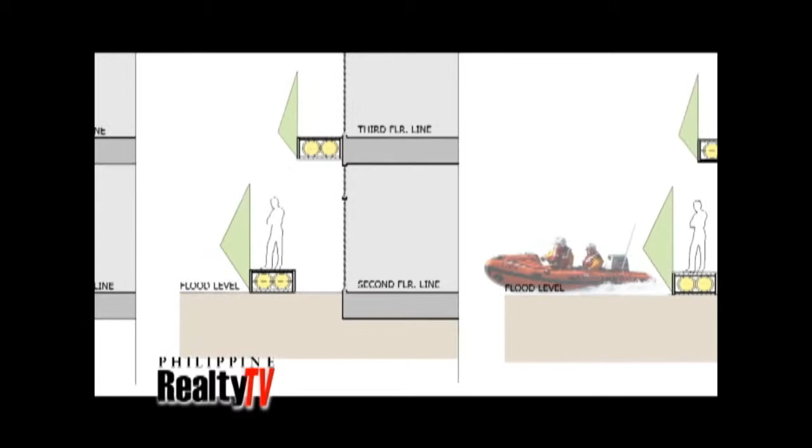And I think the most important is access, because they couldn't be saved because there was no access to simply where they were. So we have to provide some sort of escape. Whether it's just to get from room to room or to get out of the place where you're stuck in. Okay. Can't wait. Thank you. Thanks, Jason.

With a project defined and the objective set, it was up to Buensalido Architects to continue and bring the vision to life. We really drew inspiration from the people who were affected during all of these storms. We wanted to come up with an authentic solution that works without them having to migrate. Because for a lot of people, they don't have a choice. It's our job as architects to come up with a smartly designed house, with a house that responds to the climate, that moves with it, that adapts, to come up with a better kind of life for all of these affected people. So that was really where we drew our inspiration from.

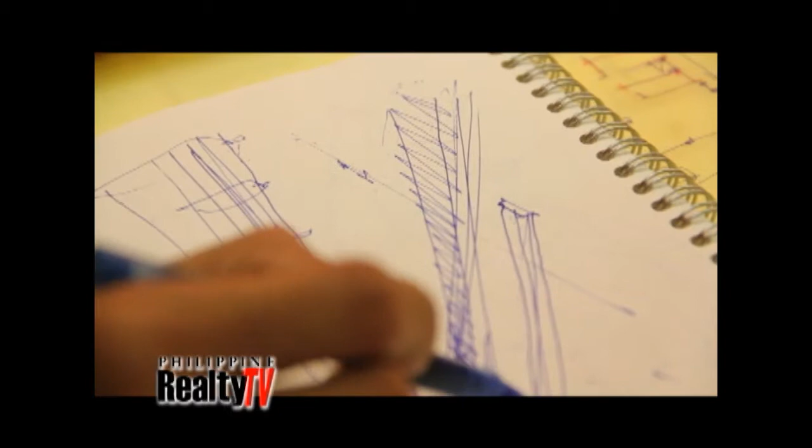After several weeks of designing, drafts changed and new design solutions attempted. John returned to the office of Buensalido Architects for the presentation of the final design of Project Smart Home Marikina. We basically wanted us to come up with a 5-door, 2 or 3-story apartments, a 3-bedroom townhouse with 1-car garage, possibly 2 if the space allows.

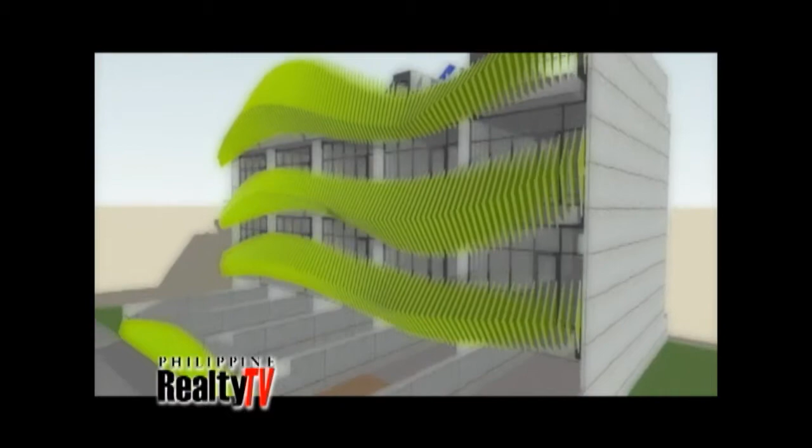Our concept is amphibious living. We're trying to mirror the characteristics of the subject, in this case, the floods, to attain a kind of seamless functional transition. So instead of fighting against the flood, you're actually getting its characteristics and trying to design your house to adapt to it by mirroring it or copying the way it moves, the way it behaves. The first thing is we plotted the flood level in the area, which is about 8 feet. The flood level basically eats up the entire first floor. And so the first thing that we did is we raised the entire house to be on stilts, just like the Bahay Kubo.

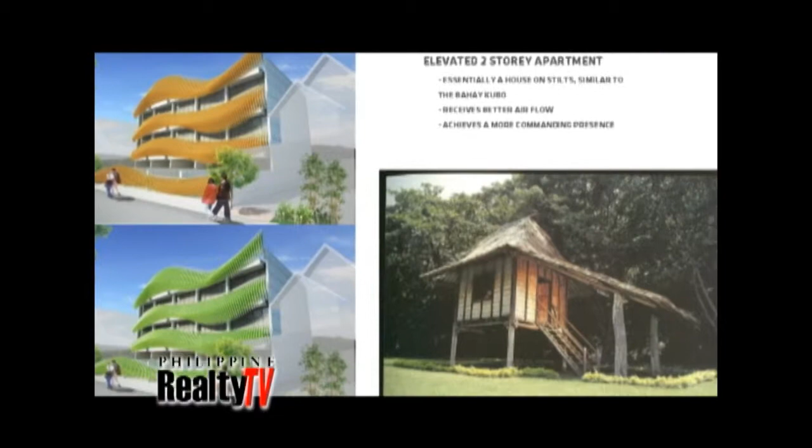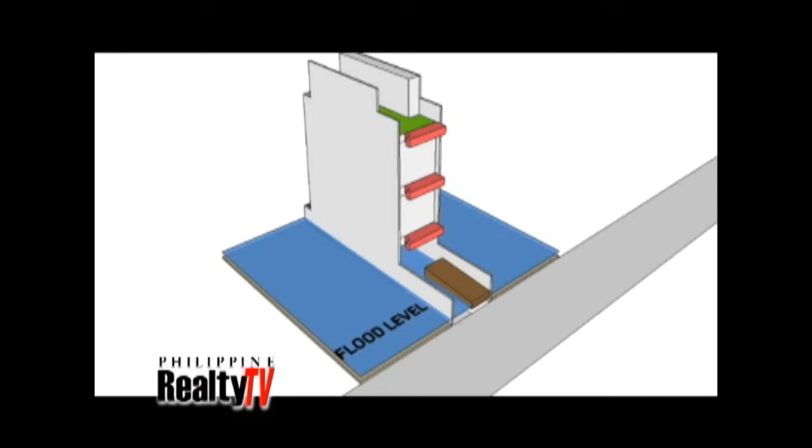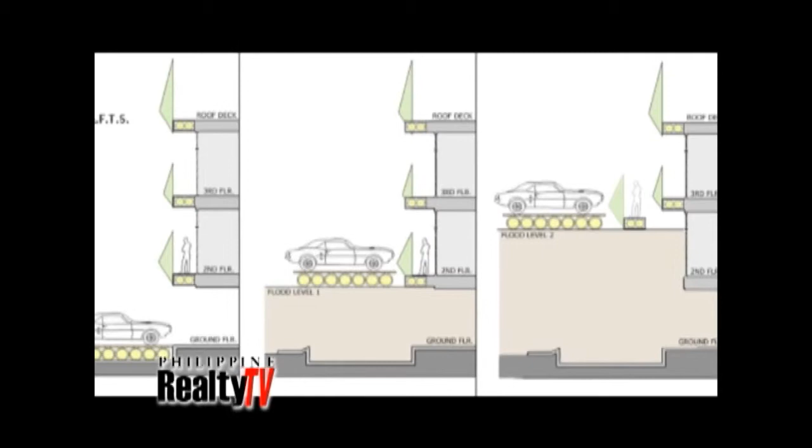I think the most unique idea that we came up with are what we chose to call RAFTs, or regenerative, amphibious, floating terraces. And they're essentially floating rafts. So it's essentially balconies that can float and can be detached. So you're never caught at a moment where you're stuck in your own house. Even one of the carports can actually be converted into a sort of raft, which can also float during flood. Wow, you've got to be kidding me. No. It's gonna float. The car will float. Yeah, that's the intent. And we have calculations to support that.

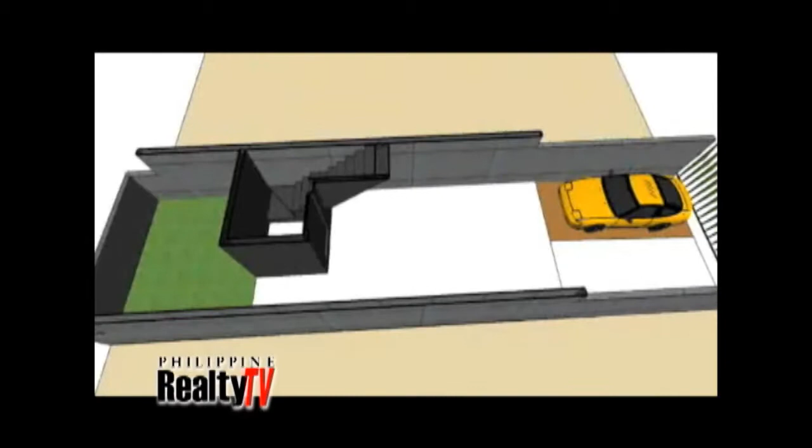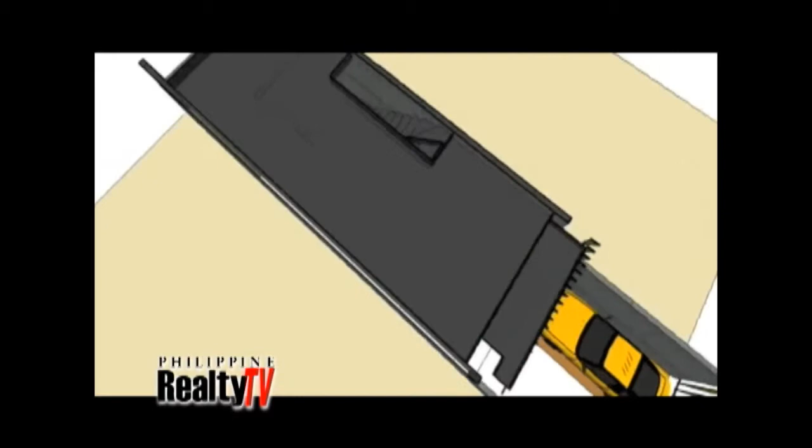Okay. This is an aerial view of the ground floor. This is essentially your open space or silong, so you can have parties there. And then you just have a basic access, so you have your front foyer, which leads to the staircase going up. Which leads us now to the second floor of the space. We switched the private function, which are basically the bedrooms, from the upper floors to the lower floors.

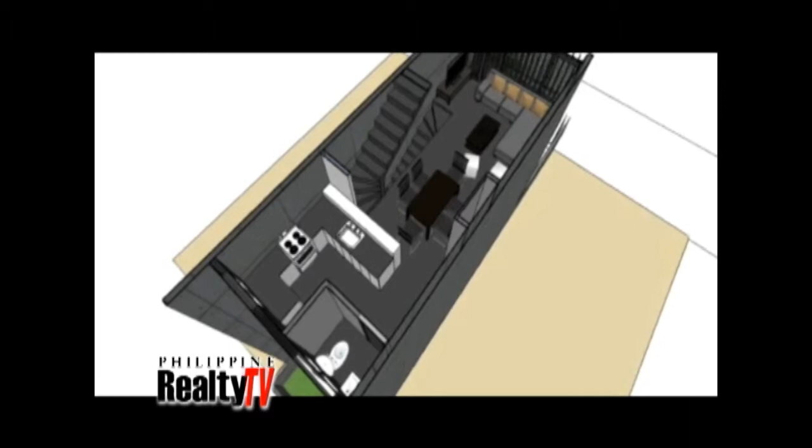This is the third floor of the house. It's essentially one big open space. You have your living area, your dining, and your kitchen, and the small powder room. And it's just one contiguous space, again allowing the family to interact with each other. And it makes sense also because most of your appliances, your ref, your food, they're on the third floor. Yeah. So essentially, that's all safe. Your supplies, that's all safe.

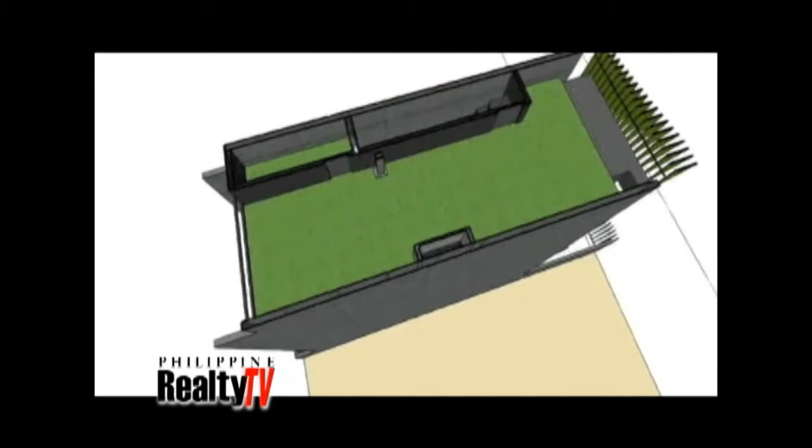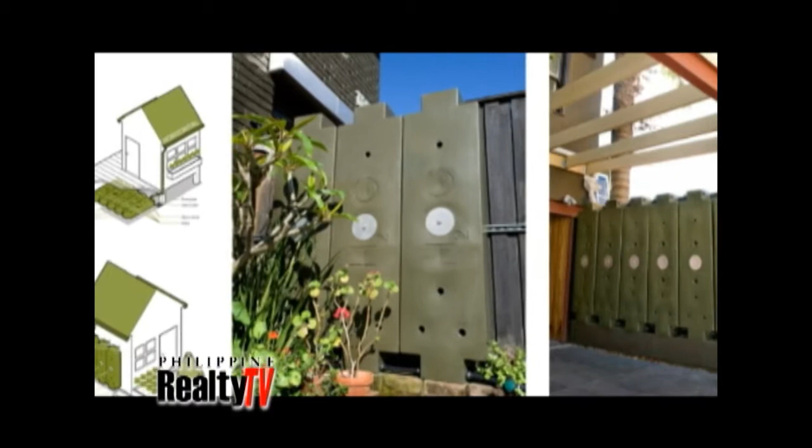Yeah, all safe. But above the third floor, we propose that there still be a roof deck. Okay. So it's essentially a fourth floor / roof deck, right? And this is your stairwell access, and what it does is it becomes the escape for hot air also. So it's not only access, but it allows stack effect to happen. And again, it's one big space wherein you can possibly put your rainwater harvesting tanks. You can have a small storage for emergency supplies, and things like that, just to make sure that in the event of a flood, you have everything that you need.

Congratulations! I love the design. I think it's something that a lot of people can learn a lot from, and I'm really looking forward to building with you and your team. We're excited to build it. Yeah. Okay. Thank you. Jason, thank you. Thank you so much. Thank you.

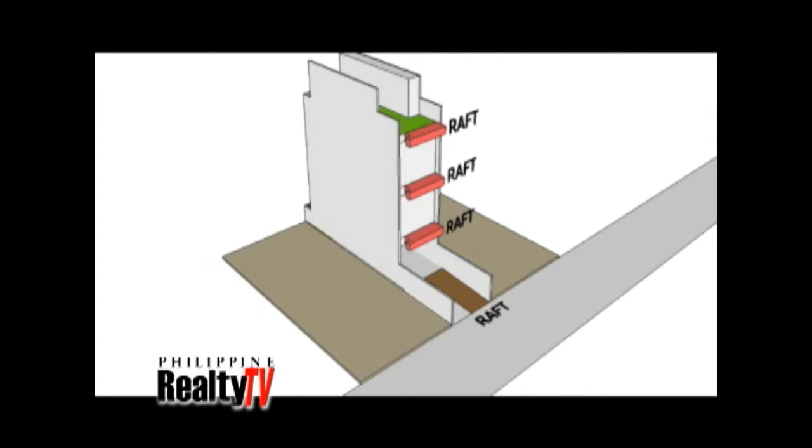The reason why I like the project so much is because I think it's going to make a very significant social impact with the way we design our houses, not only for the Marikina area, but all throughout our country in general, because this is basically showing the people that, hey, there is a better way to design our houses. I think there's hope. There's a certain sense of aspiration that is instilled in us Filipinos that, hey, we can rise above it.